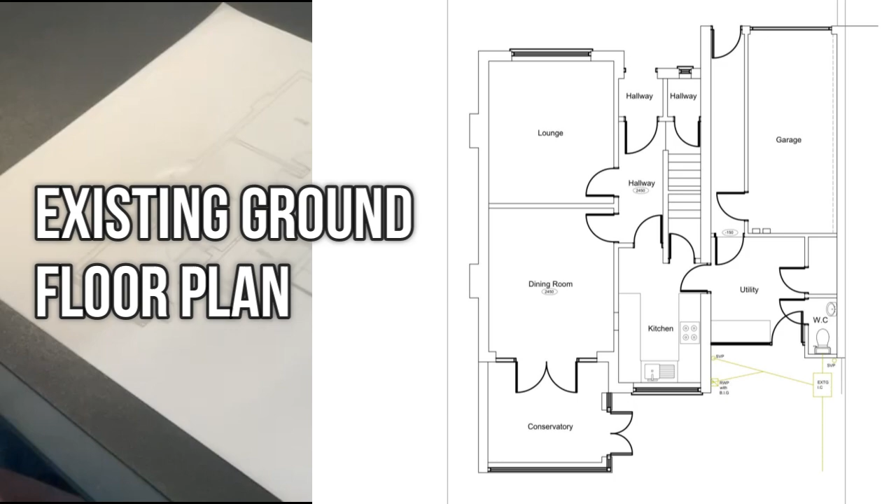This is for a single story and a two-story extension that the client is looking to extend on their detached property. The client's got in the region of 150 to 180k budget. So although we can try and do something nice in terms of the space, we probably are still limited with budget.

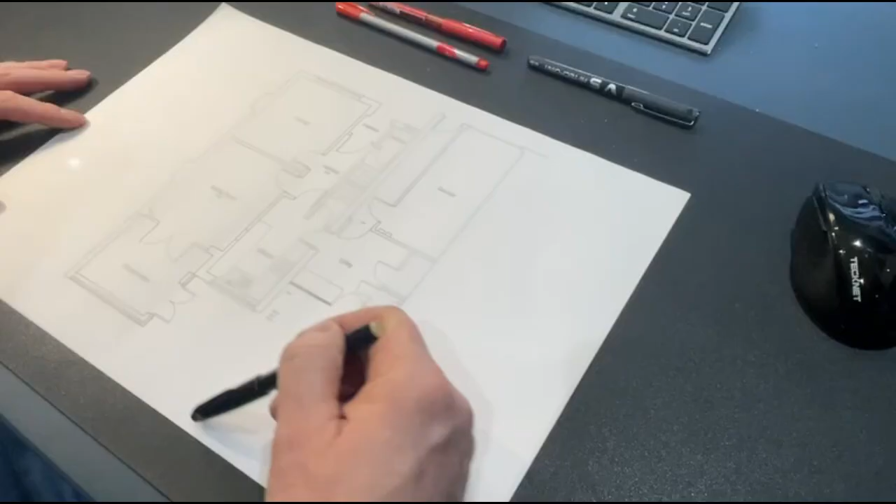The budget is tight even at 150-180k because we've got a two-story section, so potentially we've got a two-story section here that's going to go over the garage, and we've got a party wall here, so we may need to do some steel work in order to support the two-story section, rather than taking all of this down and rebuilding it.

Client's looking then to extend out the back here with a single story in order to try and open up this space. At the moment, they've got quite a large utility area, downstairs toilet and cupboard, but they've got a tiny kitchen area that just doesn't work for them.

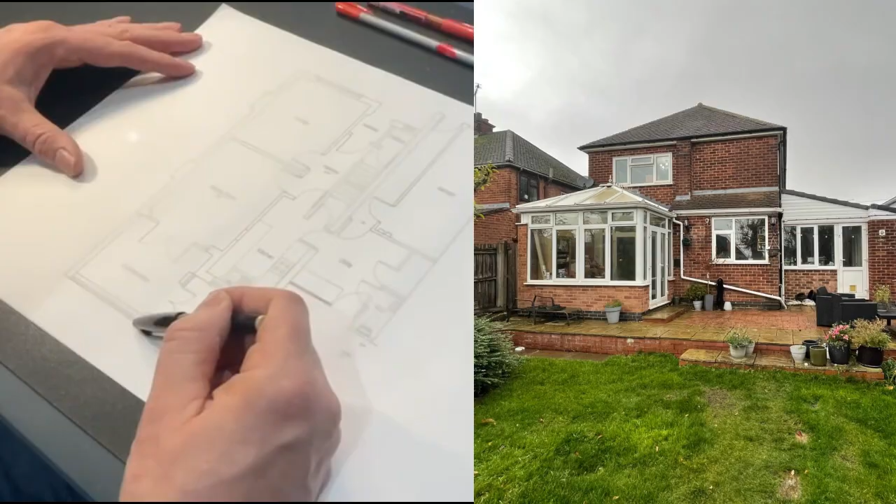Then they've got these two big rooms here as a lounge and dining room. This is a sort of 1920s, 1930s style property, and I'll put some pictures in the video of how the house looks at the moment. And we've got the classic conservatory at the back, which is pretty much just a dumping ground at the moment. It's unusable space. It's hot in the summer, freezing cold in the winter.

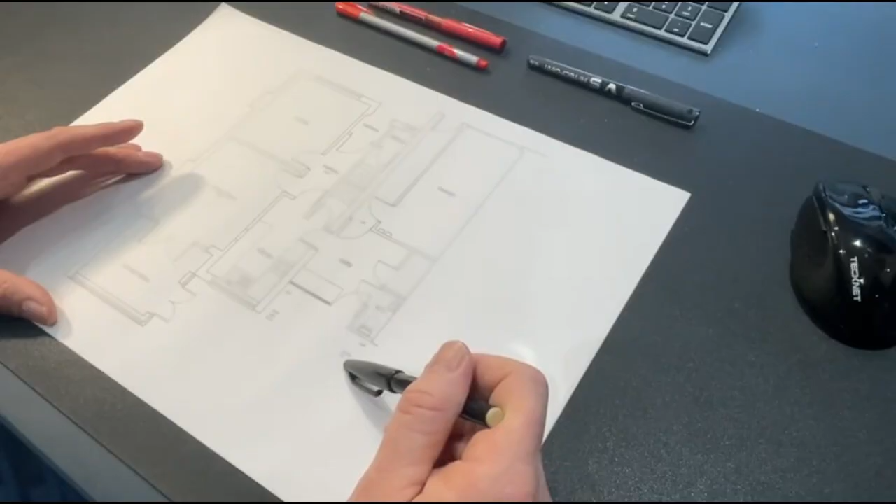Any radiators that they put in there, the heat just basically pumps out through the polycarb roof that's on top. And so we want to try and incorporate this into an extension. The conservatory is going to have to be knocked down because conservatories don't meet building regulations, so they get built without building control.

And the way the building inspectors look at them is that actually they don't exist in terms of building control. So the simplest, easiest way is to demolish them and start again. Obviously, we're looking to retain as much of the structure as we can to reuse, because that's more cost effective for the client in terms of spending their budget well.

We've also got this hallway area here, so I've got this sort of beautiful house on the front with a nice sort of big frontage.

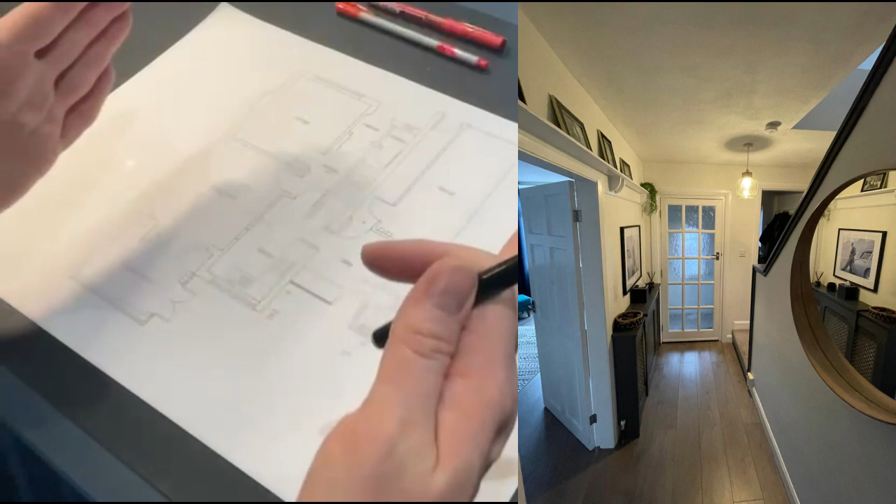You come into the front door and it's very squeezed through this hallway area, so you go through this narrow, squashed area. Then it opens up a little bit into the hallway. But you've still got a wall at the side of the stairs, so it does make that feel a little bit more enclosed than having an open balustrade.

And then into this really small kitchen. They've got a nice garden at the back, but you can't see any of that because all you can see is walls and doors as you come in.

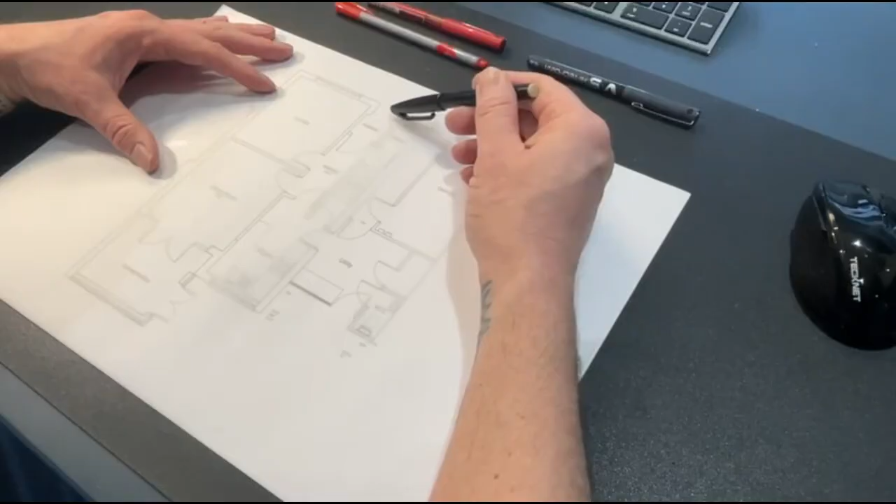So what I like to do is, as you come into the property, try to give you that little visual that grabs your attention as you come in the front door - so you can see glimpses of the kitchen or the rooms beyond that draw you through the house. Then when you get into that space, it opens up into the garden area, especially once they've landscaped it.

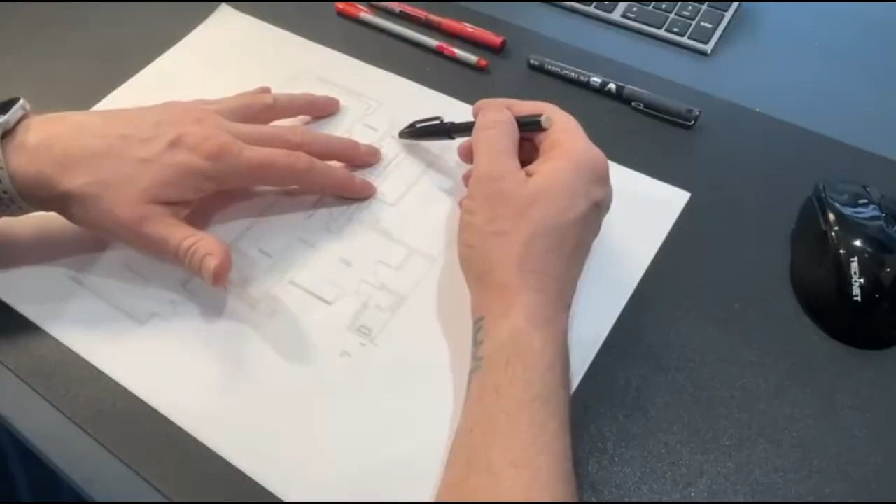But we've got this small cupboard here at the moment. We've got the staircase that comes down, a level landing with just one step that goes into this hallway cupboard. I think we can open this area up and make it much more inviting, rather than this very narrow tunnel they come in at the moment down into this space.

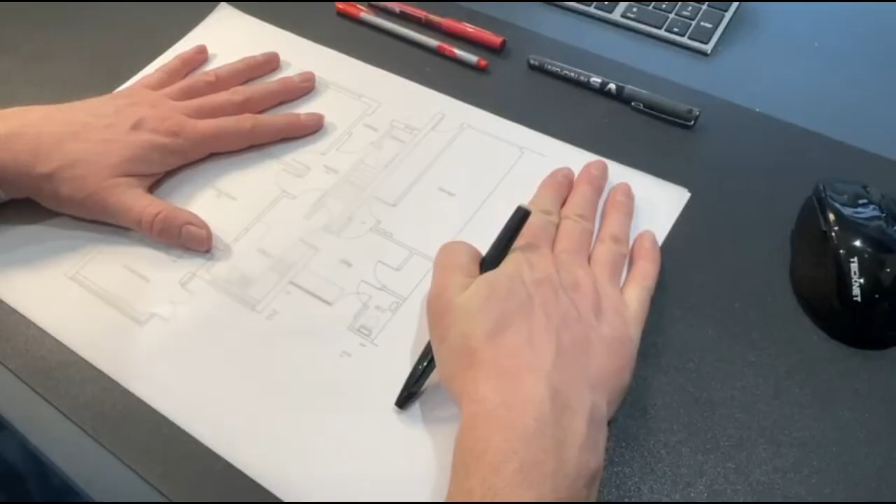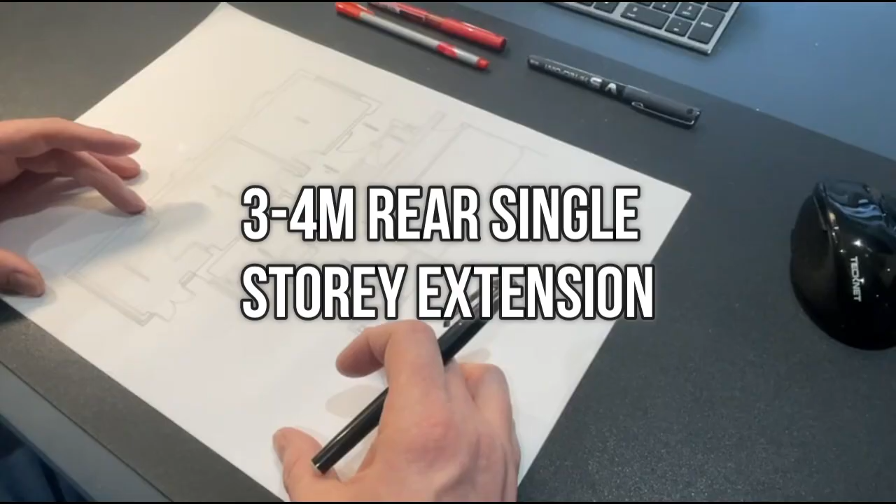So I've had a look at a few images and ideas, looked around, taken into consideration some of the other jobs I've done previously, and actually done another property in the same road. So I'm just going to sketch some ideas and look at what space I've got. I know roughly they want to come out at the rear probably 3-4 meters at the back, so that gives me a line to work to in terms of how far I'm coming out and what I can do.

And then I'm just going to look at potentially reconfiguring this space and trying a few different options of how that can evolve into a more open plan living and a better use of the space that they've got.

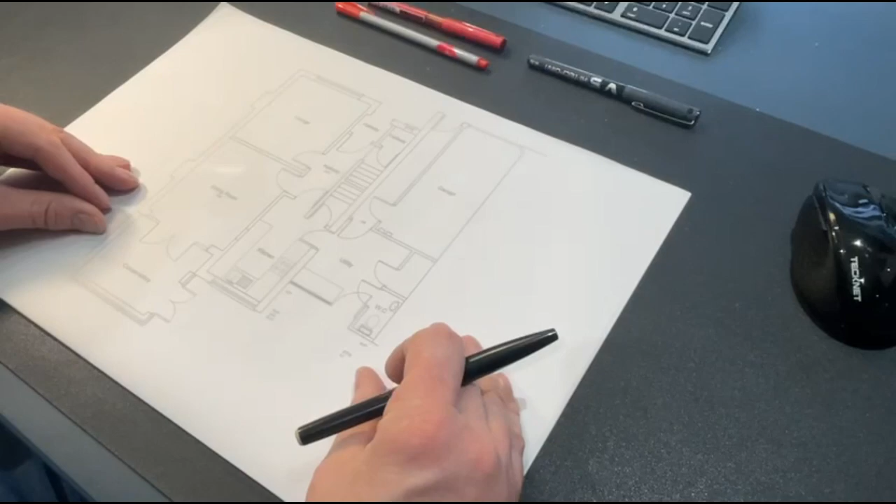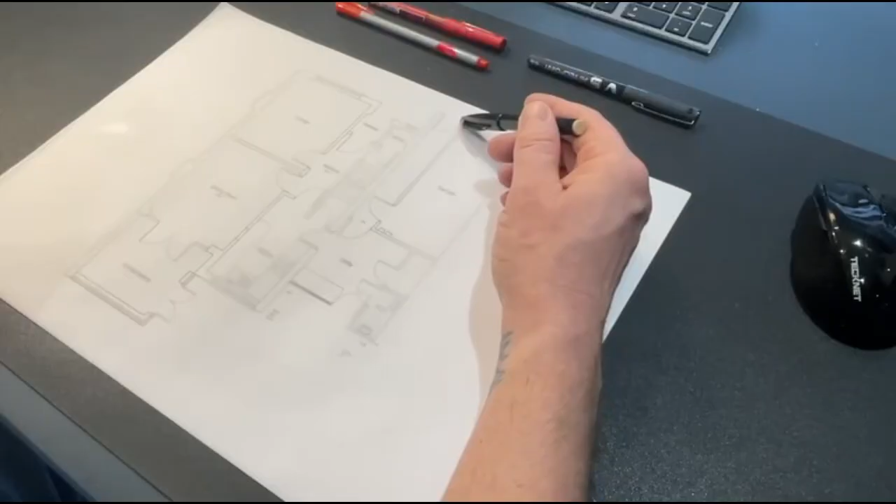They've also got this big garage area which they use - the husband's got a motorbike, so needs a little bit of space for that. But generally with the garage they just use it for storage. Not many people really put cars in garages anymore, and a lot of older properties have garages that are too narrow, so although you can get the car in, you can't really open the doors either side. We've got this narrow garage and a walkway down the side, so I think we could reduce some of that space and use some of it to incorporate into their new space.

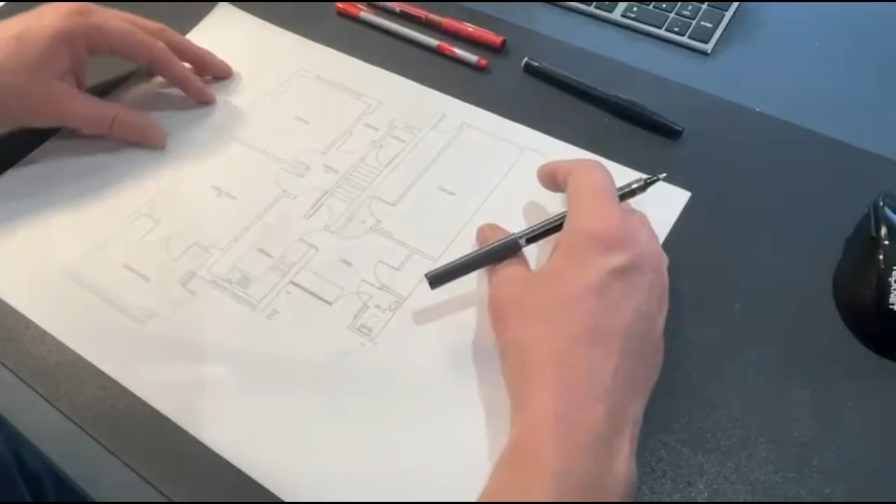So I've got my existing floor plan that I've just roughly drafted out. I've got a piece of trace on top. I like doing this by hand, and I do use my iPad and do it electronically, but sometimes doing it with a bit of tracing paper just feels nice.

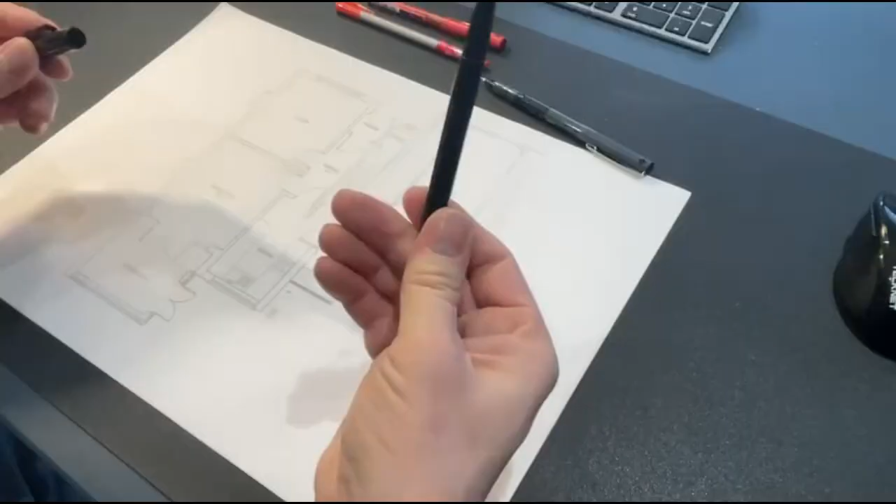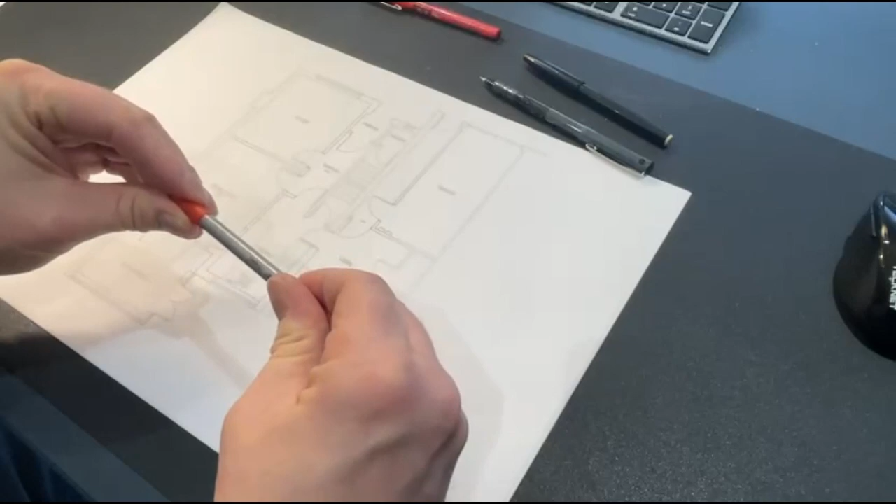I've got my various pens - a 0.5 Hi-Tec Pilot pen that I use, quite good to work with. Then I've got my slightly thicker black pen that's good for getting some layouts down. Then a couple of red pens, a thin 0.5 and a slightly thicker medium red pen to go over the top, because sometimes I draw something and it doesn't quite work exactly as I want, so I'll use a thicker pen or a red pen to try and work that out.

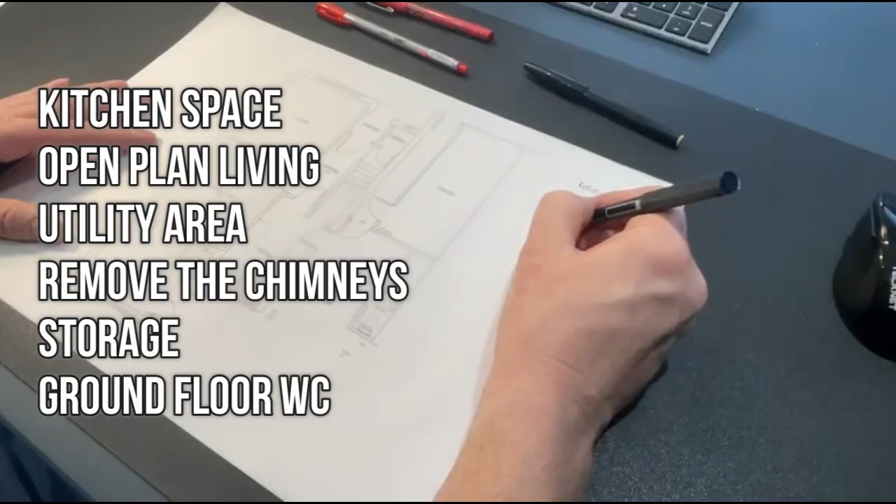So in terms of the spaces, we're looking for an open plan kitchen. We are looking for a utility area, potentially to remove the chimney breasts. Then we need a little bit of storage in the area, and a ground floor WC. So these are the spaces I'm working with on the ground level - I like to scribble down a little list of what spaces I need to consider.

So that's the thinking behind the process in part one. We've understood the brief, we've analysed the space, and we're looking at what the design constraints are on the site before we put pen to paper.

Now, in part two, I'll be sketching out the layouts, looking at moving kitchens, the circulation and entrance space, and how to refine these floor plans on a trace to actually achieve a final design.